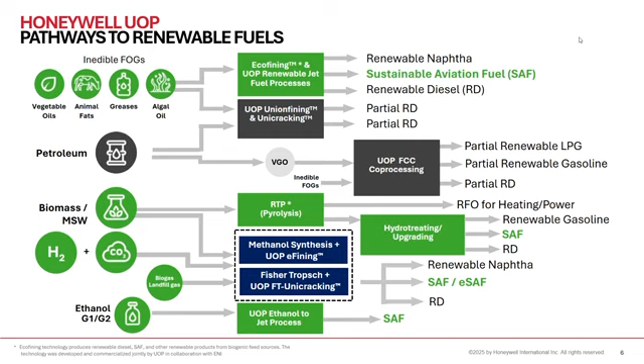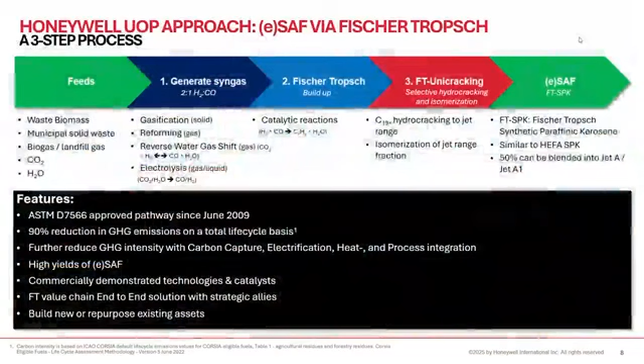Let's now delve into more details of Fischer-Tropsch pathway with Honeywell UOP's Fischer-Tropsch unicracking technology. If you look at the Fischer-Tropsch pathway from a high level, we can break it down into a high-level three-step process, where in the first step, syngas will be produced. Depending on the type of feedstock, there are multiple available technologies like gasification, reforming, reverse water gas shift, or electrolysis technologies available to convert feedstocks into syngas.

This syngas is then cleaned up and adjusted to an appropriate hydrogen to carbon monoxide ratio and fed to a Fischer-Tropsch unit, which is essentially a catalytic process to convert the syngas to a synthetic crude. The synthetic crude is then fed to a hydrocracking unit consisting of hydrocracking reactor to convert C19 plus molecules to jet range and hydroisomerize to meet cold flow properties of SAF. The result is SAF with properties akin to those produced by the HEFA process. The SAF derived from the Fischer-Tropsch route is known as FT-SPK, which stands for Fischer-Tropsch synthetic paraffinic kerosene.

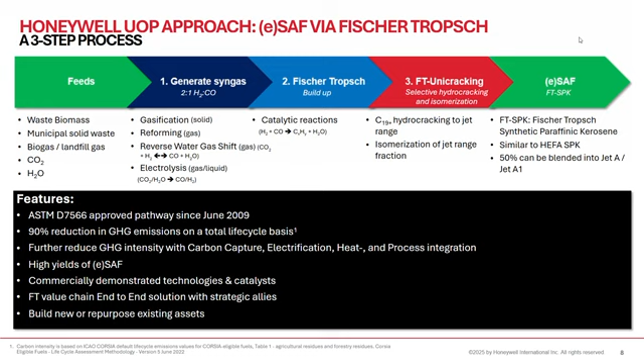Investors are drawn to Fischer-Tropsch pathway for several reasons. It's an ASTM approved SAF pathway since 2009 with a high technology readiness level and carbon efficiency, enabling substantial renewable fuel yields. Additionally, the potential to integrate carbon capture units to produce carbon negative renewable fuel products enhances its bankability.

Before I go to the further details of Fischer-Tropsch process, you must have seen in a recent press release last November, Johnson Matthey and Honeywell UOP have signed a memorandum of understanding for an end-to-end solution for customers considering either a Fischer-Tropsch or methanol-based sustainable fuels pathway, which drives down operating costs and accelerates the deployment of viable sustainable fuel projects. The partnership brings together Johnson Matthey's leading syngas solutions for both Fischer-Tropsch and methanol pathway and Honeywell's market-leading expertise in fuel upgrading technologies.

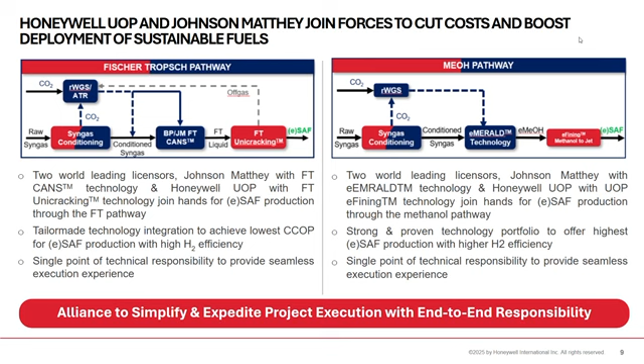The objective is to offer single point of technical responsibility to provide seamless and faster execution experience with end-to-end solution. We have been working together for multiple projects globally, and that gives us a confidence to provide right and optimum technology solutions to our customers. Just to be clear, the relationship is non-exclusive in nature, meaning Honeywell and Johnson Matthey are agnostic to the technology solutions to produce SAF via Fischer-Tropsch or methanol pathway.

Let's now delve into the chemistry of Fischer-Tropsch process to gain a better understanding. The Fischer-Tropsch process generates a synthetic crude that is notably paraffinic and devoid of contaminants such as sulfur and nitrogen. This crude primarily comprises three major fractions: light ends, Fischer-Tropsch liquids, and Fischer-Tropsch waxes.

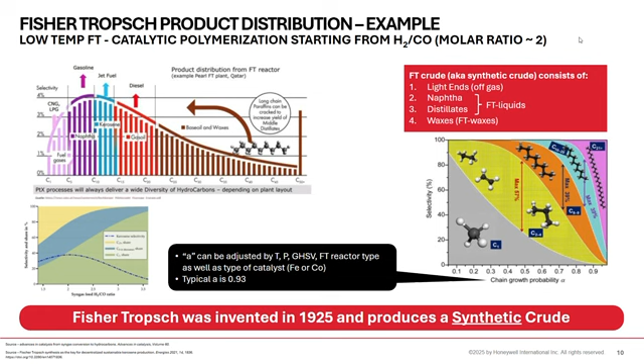From a catalytic perspective, the Fischer-Tropsch process predominantly uses a cobalt-based catalyst as opposed to an iron-based one which was utilized in the past. This choice favors the production of longer molecular chains as depicted on the right, resulting in a very low volume of gaseous effluent and a relatively low amount of naphtha. Consequently, even without recycling and reconverting these components into gas, high SAF yields can be achieved via Fischer-Tropsch pathway. Ongoing innovations in both Fischer-Tropsch synthesis and hydrocracking steps are likely to achieve high renewable fuel yields through the Fischer-Tropsch pathway.

You might be aware that the synthetic crude coming out of the Fischer-Tropsch synthesis process contains a broad spectrum of molecular weights and requires upgrading. As we have seen on the slide with the block flow diagram of the Fischer-Tropsch routes, once the synthetic crude is produced, it is then sent to the hydrocracker after removal of the light ends.

From a hydrocracking complexity standpoint, it is quite straightforward since the hydrocracker operates at low pressure and does not typically require hydrotreatment. It is a single-stage recycle configuration, for which Honeywell UOP has many commercial references in different applications. To be more specific, we have more than 80 commercial references, and we are utilizing commercially proven hydrocracking and hydroisomerization catalysts within this process, thus making it straightforward and low risk.

The question is, why opt for UOP's Fischer-Tropsch hydrocracking technology? The Honeywell Fischer-Tropsch Unicracking process is capable of providing 3 to 5% more SAF yield at about 20% lower capex. It also reduces byproduct process and waste streams compared to competing Fischer-Tropsch hydroprocessing technologies. These advantages lead to a higher net present value and IRR, contributing to multiple project awards to Honeywell UOP.

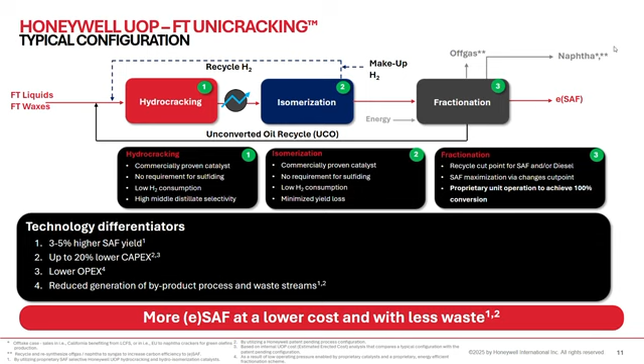It is also worth mentioning that Honeywell UOP can offer this as modular as well to further reduce project execution risk and overall project schedule for the Unicracking block, ranging somewhere between 6 to 12 months from the overall project schedule.

Let's talk quickly about Honeywell UOP's Fischer-Tropsch upgrading experience. UOP has been actively involved in renewable fuels technology since the 1980s. We have experience of designing and licensing a Fischer-Tropsch liquid upgrading technology for a 13-barrel per stream day demonstration facility, and that unit ran successfully for 5 years between 2008 and 2013. We have an experience of 1 barrel per stream day demonstration of single-stage recycle upgrading of Fischer-Tropsch liquids and wax to SPK product for a Japanese customer in 2020.

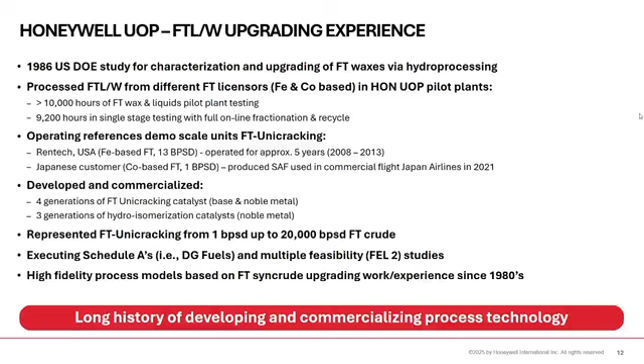We have more than 10,000 hours of pilot plant testing. UOP remains a dynamic player in the renewable fuel sector. This commitment to innovation and advancement in technology underscores UOP's long-standing dedication to the field.

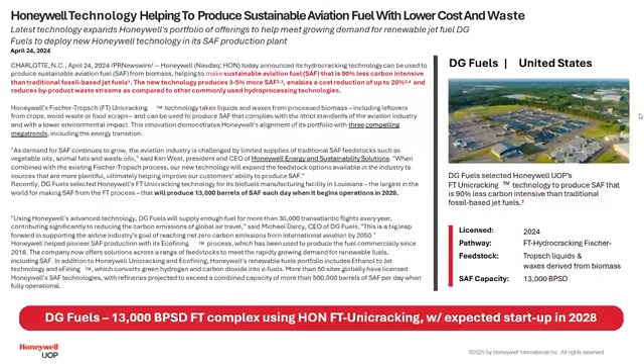As a proof point of our technology favorability, a recent Honeywell press release on DG Fuels highlighted the award for the world's largest FT hydrocracker, which is set to produce 13,000 barrels per stream day of SAF with an expected startup in 2028. The client also plans to build additional units in the United States, utilizing Honeywell UOP's Fischer-Tropsch upgrading technology, underscoring the trust and confidence in our solutions.

Let's talk about typical project development phases. The typical project development phases span between 3 to 5 years. The slide illustrates these phases, and I would like to delve deeper into the pre-FID phase, which can last anywhere between 18 to 30 months, depending on the specific project. Breaking down the pre-FID phase, we identify 3 key stages. Phase 1 involves developing a Class 5 cost estimate as a part of the FEL1 deliverable. During this stage, customers and project developers seek high-level budgetary estimates to assess the feasibility of their projects. This phase is crucial for preparing funding applications, environmental permits, offtake agreements, and other administrative requirements, requiring close coordination with licensors.

Once Phase 1 is complete, we move into FEL2, which provides a more in-depth analysis of the project to achieve a Class 4 cost estimate. This is typically accomplished through a feasibility study. Finally, we arrive at FEL3, or the basic engineering phase, which enables the final investment decision, or FID, and initiates the EPC phase. The outcome of this stage is a Class 3 cost estimate. Following the FID, the project transitions into the EPC phase, eventually leading to startup, commissioning, and operation.

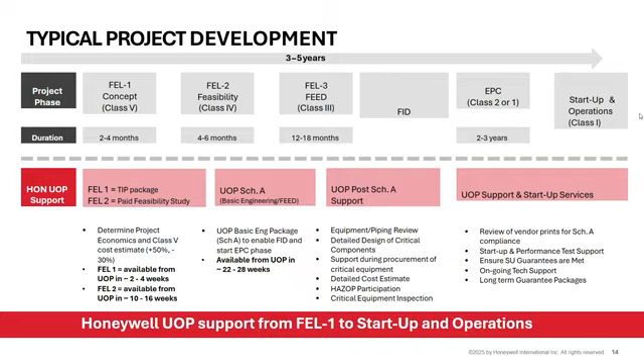Honeywell UOP is equipped to support customers and project developers throughout all these phases. We have successfully collaborated with multiple clients worldwide, offering technical and project execution expertise, modular solutions, and the right partnerships to provide single-point responsibility, thereby enhancing bankability and minimizing project risks. If you have specific projects or questions about the information provided in the slide, I'm available to discuss them offline.

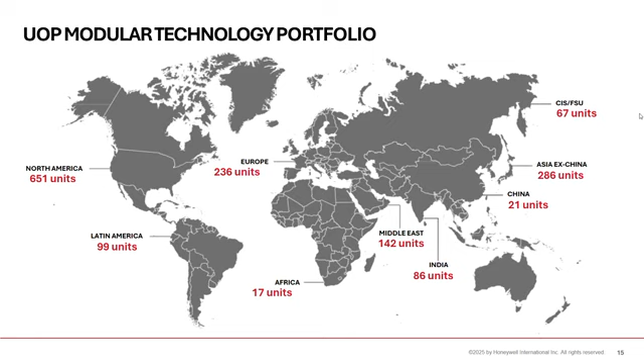Honeywell UOP has a unique strength to offer a modular technology portfolio. As customers seek swifter, more efficient, and cost-effective project execution, Honeywell UOP provides a modular solution to meet these demands. As you can see on the slide, Honeywell UOP has worldwide modular experience with more than 1,800 units operating successfully.

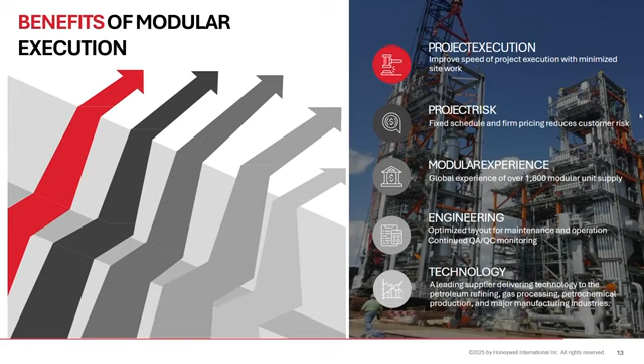Modularization is crucial for several reasons, particularly in industrial settings. It offers a safer and more efficient way to add new units to existing or new facilities, especially when space is limited. It minimizes disruptions to operations due to less on-site construction and congestion. Additionally, modularization reduces material waste and loss in the field. In essence, modularization can lead to significant cost savings, improved quality due to a controlled environment, and faster project completion times. Honeywell UOP can work with you to provide a seamless modular experience for your specific projects.

Thank you for listening. Talk to us to help you navigate the right pathway based on your business model and investment strategies. With technologies that convert the broadest range of feedstocks to SAF and expertise to back it up, we are here to help. Thank you.